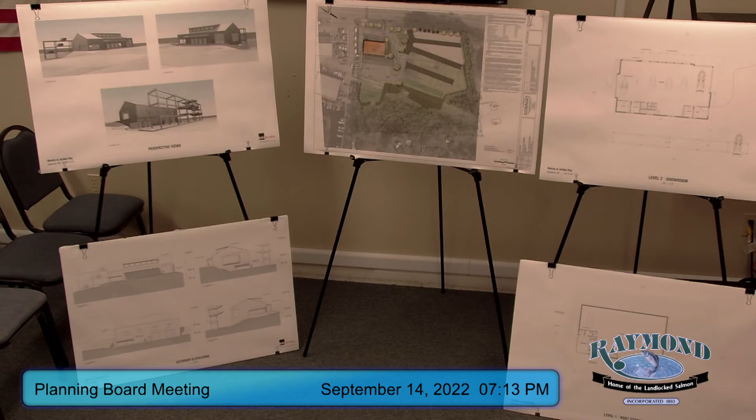The project in front of you tonight is an expansion of the Jordan Bay Marina proper marine site. Our client purchased the property to the south of the marina, formerly owned by the Hartleys. The parcel we're looking at developing is about 5.9 acres in size. Of that 5.9, we're really looking at developing the portion that fronts Roosevelt Trail back to the easement that Portland Pipeline has through the site. We don't plan on anything other than stormwater management beyond that portion of the site.

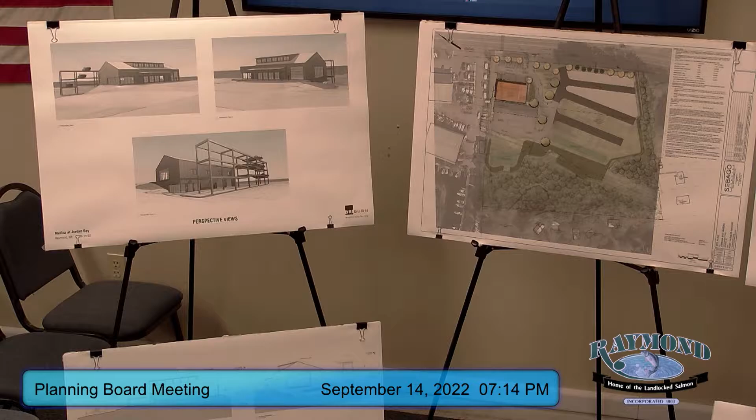As mentioned at the beginning, we had a sketch plan meeting with you all on May 11th. Subsequent to that, we presented that we were going to have a pre-application meeting with MDEP, which followed a couple weeks after, and it was a good meeting. On June 2nd we had the site walk, and a fair amount of neighbors showed up for that. I thought it was a positive meeting with some positive feedback. A couple weeks later we resubmitted back to MDEP from the preliminary submittal we'd given them. They wanted additional information from us to determine whether our project would need to be reviewed under the site location of development standards, or whether it would just fall under Maine stormwater and NRPA rules for the wetland. Based on that, they came back and said we don't hit SLODA, so the only thing they'll be reviewing the project for is Maine stormwater law and the Natural Resource Protection Act for the wetland.

Since that time, we've done some major coordination with MDOT. We've met with them, and we've also reached out to Portland Pipeline and Portland Water District to make sure we had their input relative to the project. Tonight we've also brought elevations and renderings of the building. We did not have that in our initial application, but we had commissioned an architect to start that process, and those have been provided as part of the resubmittal materials you'll probably see within the week.

Beginning of August we made our submittal to the town. We also had another neighborhood meeting on August 10th for the submission we had to make to Maine DEP, to go over the project once again and highlight the natural resource permits we had to get and the stormwater permit we were getting for the site. Once again, we felt that was a good meeting with the neighbors.

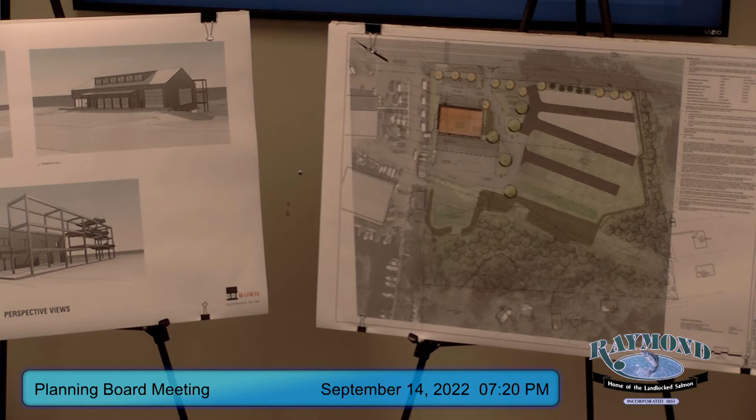Part of the final design will involve looking at energy efficient heating and cooling processes for the building, and conservation and eco-friendly design relative to fixtures. Lighting will most likely be LED, with solar electric and low electric use.

Landscaping, once again, we have the natural buffer along the southern and eastern sides. Along Roosevelt Trail we've framed that with street trees, mostly maples, but broken up a bit with a series of greenish colored conifers so you're not looking at one static, continuous row of maples. You've got some maples, some conifers and maples, and around the front of the building there'll be accent landscaping along Roosevelt Trail, as well as juniper plantings on the slopes adjacent to the building, so it'll nicely accent the building.

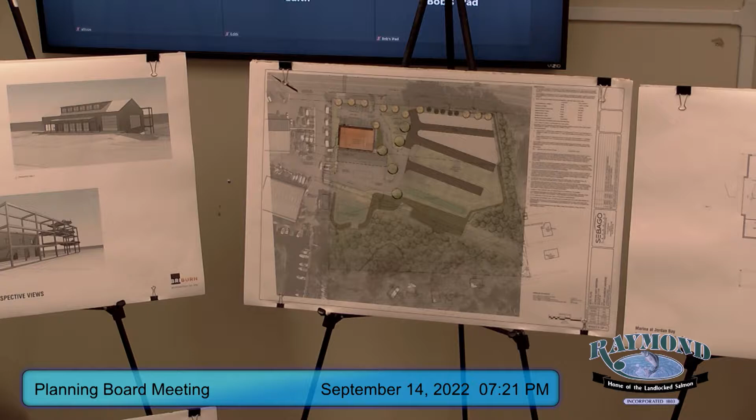Lighting, once again, the building itself will have a lot of natural lighting inside. What we'll probably do on that canopy portico that overhangs is have some down lighting right there on the sidewalk fronting the building. We have shown lighting on our site plan.

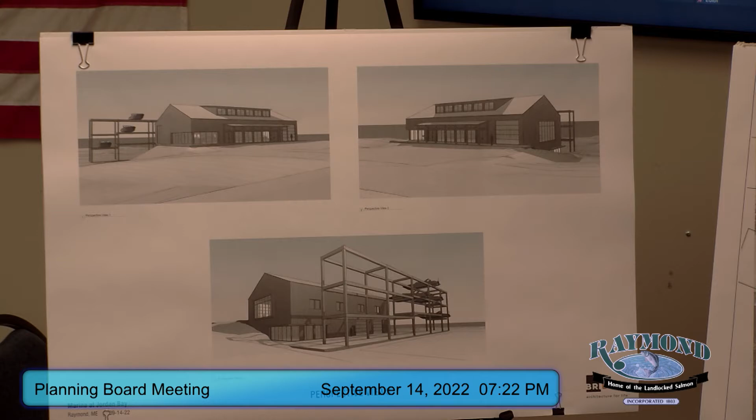We'll have full cutoff fixtures. They're all LED, very energy efficient. They match what we used on the project that we did 7 years ago, when we redid the front of the Marina site. We put some lighting in there, and it's that full cutoff LED lighting. And some lighting there on the building also, and probably some accent highlight lighting for the building. Nothing that upshines, of course. We want to have dark skies and whatnot, but stuff that comes down to the ground and whatnot.

Signage, we're not really sure what we want to do. We know that we want to put some signage along the front. On the plans that have been resubmitted to Will and Wayne, there is a monument sign, ground monument sign, adjacent to the front entrance. It'll be two-sided, so you'll see the name from both sides. We'll also, as part of the comments from Wayne, put the addressing on there so that emergency personnel can capture that when they're coming in and whatnot.

So that's kind of an overview of the highlights of the project. And now I'd like to go and touch on the comments. Comments were really straightforward, comprehensive and whatnot. I'm not going to mention all of them. I just want to go through and highlight some that are informational for you, and some that we feel we need some direction from you on.

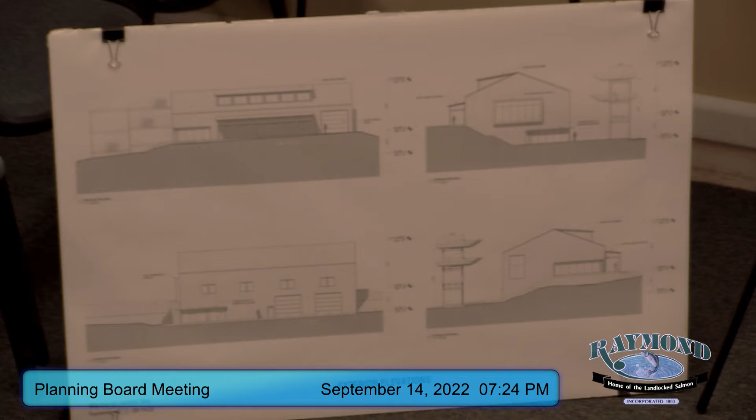And if you remember, as part of our last approval for the dock expansion, we were to put a meter on that bathhouse building and meter that. We have been doing that most of the summer. I think it was late June, July, up through every week I get an email with a picture of the meter so that I can record that data.

And we've used that data to design the sanitary system that we propose for this project. What we've done is we've conservatively taken that flow that we've got, upped it up, I think it was 50% more, taken all the flow from the other building, put that on top of it, and whatever flows we would have from this building into that new system in the septic tank we'll be putting on this parcel. Right now, we'll still continue using the other system. Once we build this building, the only thing that will go to that is the older building. Once we have a problem with that field, we'll stub out our system such that we can connect in—the field that we're putting in is already designed to handle that.

So, is the old bathhouse going away? Is that what I heard you say? Yeah, the use of it as a bathhouse is going away. We don't know what we're going to do with it now. We may use it for storage or something like that, but it will not be a bathhouse facility. So that was one of the comments. I just wanted to highlight that for you all.

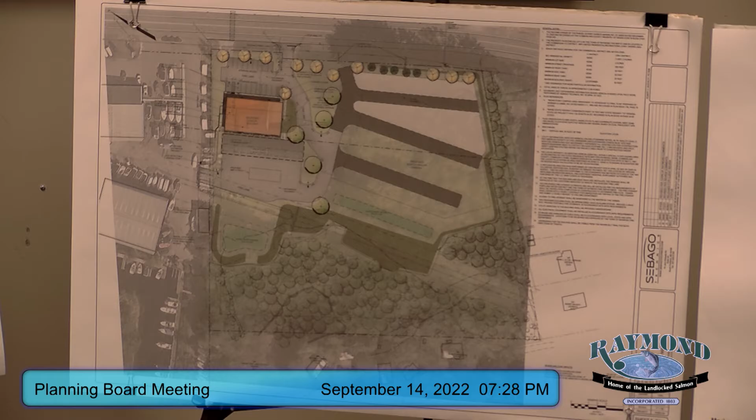Over where our other stormwater pond is, there's a little bit of filling in over at that location too. We mentioned that within our initial submittal letter. Will had asked us to provide the exact volume that was in the filling. We actually did a more precise calculation, and the number actually went down. We have about 54 cubic yards near the underdrained soil filter number 1, which is more to the southern side, and then about 96 cubic yards on the other one.

Originally we had said that the result of filling that, if you look at just the surface of water on Sebago Lake, the filling would be 0.00005 something. Well, it's now 0.00003 something. So it doesn't impact the flooding for the lake.

Relative to our permitting, once again, we have submitted it to everybody. We do have responses from IF&W, Maine Historical Preservation, and the Conservation District, Conservation Commission, and there was nothing flagged by them in their replies. Once again, Army Corps, MDEP, Stormwater, NRPA, and MDOT opening permit for the water line, and the driveway entry permit is in the process right now. We hope some of that will be resolved by the next meeting, but we think DEP may be out a little longer than that.

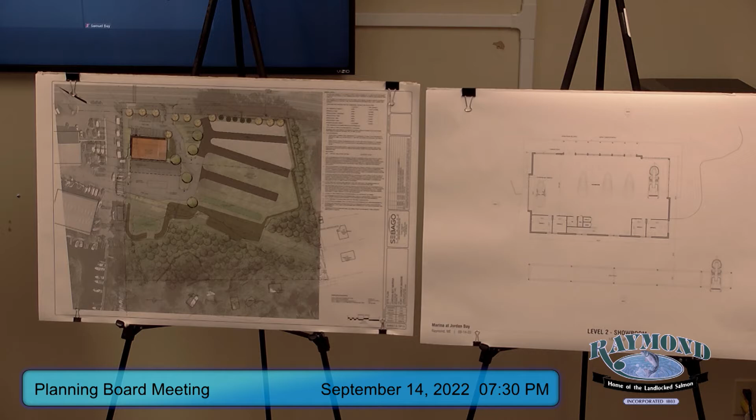Down to comment 20, I did a brief overview of the information relative to the design guidelines. There's a much better write-up in the response. Our architect did a very good job, and then I added in some stuff on that. I went over the building and the concept and whatnot, and I can elaborate more on that if you have questions.

Sneaking down to comment number 21. As part of the project, we've shown parking along the front of our building. We originally had 19 spots. We've lost one of those spots because we need to have a clear aisle into our fire department connection. By code, we need about 30. For the use that we already have on the site, we know we don't utilize that much parking in front of the building, and we addressed that in our narrative.

Will suggested that might be handled by the board through a waiver condition. We stated that if there's a problem with the number of parking, then we will provide additional parking over where the boats park for our employees. But we feel that the 18 spaces that we have are sufficient for the site, and would like to have direction from you all on how you want to handle that.

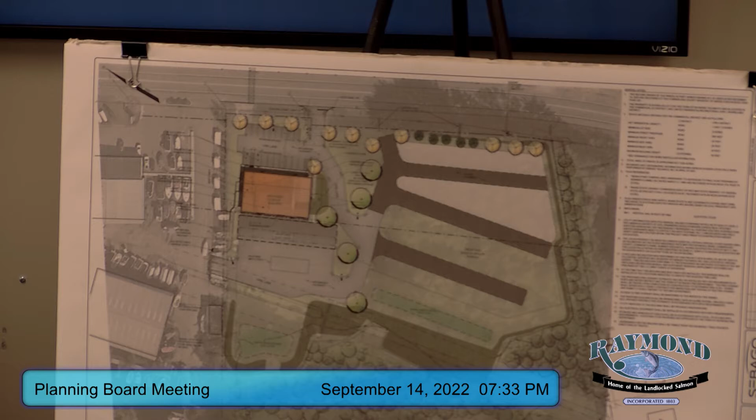Skipping down to number 31, the ordinance requires 100 square feet of intermediate landscape island in parking lots for buildings greater than 5,000 square feet. Once again, the parking that we've supplied is a little over half of that. We've tried to offset that by having a green expanse area to the south of that, and we're not sure whether the green area we provided in the landscaping in that general area is sufficient to cover that.

Or do we need to carve out another island in the middle of the parking there? So, some direction from the board on that.

It was requested that we provide a photometrics plan. Lighting was put on the site plan relative to what we felt would be adequate for security purposes. Really, we don't have a big nighttime use here that happens when you need lighting. Most of our activity is in the spring, summer, very early fall, and to have a really lit up parking lot doesn't make a lot of sense.

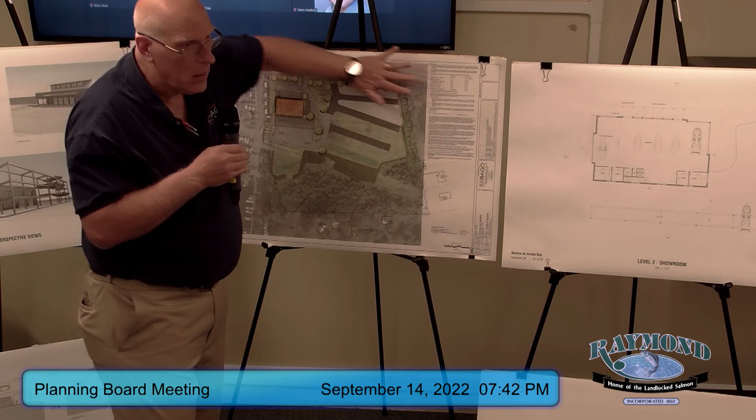We met with DOT on the driveways and on that drainage, and what we're going to do is regrade that. We're going to put some stone there so that it doesn't get all monkeyed in again, and that will drain off into their swale that goes along Route 302 and Roosevelt Trail.

As part of looking at that, we looked at the downstream pipe to make sure that would not be a problem, and have demonstrated that it's hydraulically sufficient for any flows. We think most of this flow goes that way anyways.

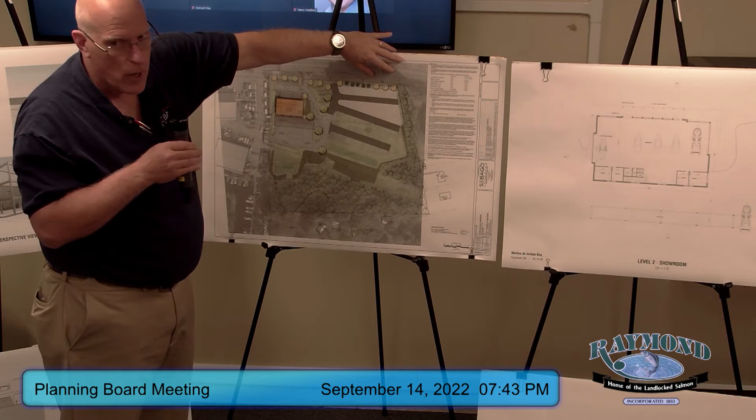There's a kind of a slight depression here. Some of it might fill up and had been meandering through the property, but we believe most of it was going that way. To make sure that the pipe could handle all of it, we looked at the drainage that came through that, being very conservative. We took into account all the area up here that currently comes over here, which probably backs up here and then goes across this property right now.

So Rob, if we look at the existing conditions, the water now, the stormwater that comes out of the treatment and is going into the buffer, that water is eventually going to leave the property. Yeah, it's going to go back to the wetland where it goes.

Everything right now drains this way. Right, but isn't the bottom there Indian Point? No, there's a wetland right here, and it goes down and then down into the lake. That's a historical flow. It doesn't go directly into Indian Point. This wetland complex drains, and then that goes down into the lake.

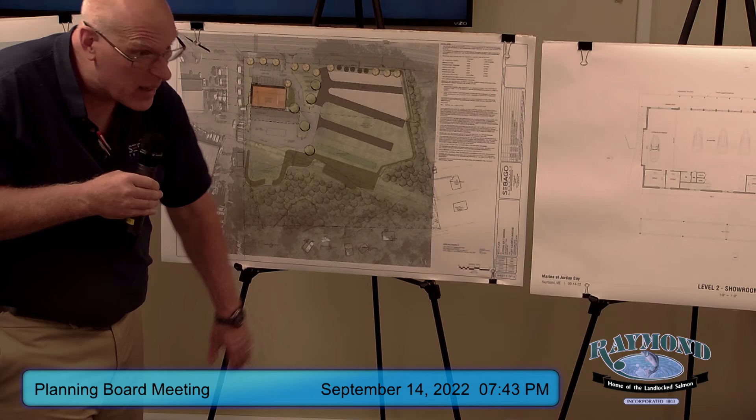So the houses shown here on this existing water flow, they drain back to that wetland also, and that flows around and out this way. Are there, I probably should know this, calculations that show the increased amount of water runoff that's going to occur over the impervious area, as opposed to what's happening now?

We've done pre versus post based upon our development that shows what's going to happen. We attenuate that as part of our stormwater design. And now we know that the wetland area is not going to be overrun with the additional water? It shouldn't be, no. Do we know that, or just we're hoping? Well, the underdrained soil filters are also detention, they provide a certain amount of detention, so they've basically met their pre versus post. What happens before it is discharges to the wetland.

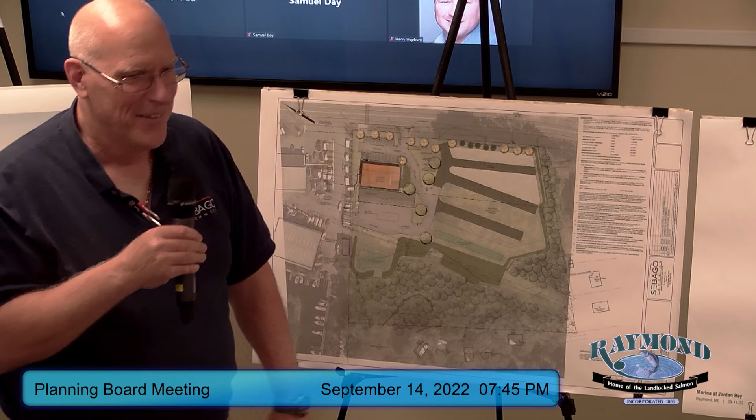Okay, thanks, okay, you got it? Got it. I'm good. Just think of it as a bowl with a little hole in the bottom. The water gets poured in there, and you're waiting for it to all leak out.

I think those are the only things that I wanted to cover. The other comments relative to the, from Wayne, I think I addressed all those. A lot of them were notes on the plans or showing stuff on the plans. He probably hasn't fully reviewed them, but I think we've addressed everything there, and I don't have any concerns on them. I think we'll work out whatever little things are left. And if there's anything that I didn't touch on in the comments that you guys have read and you want to address, I can address that now.

Yeah, so I mean, I think Rob basically addressed all of the ones that I had circled as well in terms of the ones that I thought he should touch on, so I think we're on the same page there. I guess a couple things just to touch on. Obviously we still need time to review a lot of these comments that we just received, so I can't address all of them in terms of what we received this morning, but I guess one that I wanted to touch on.

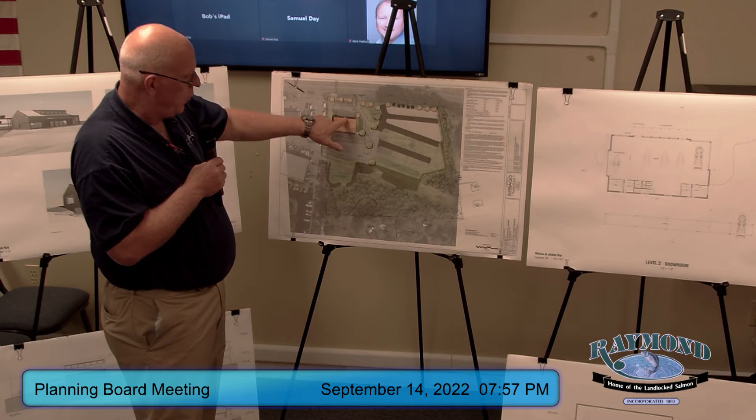Okay, good. I had mentioned we had one in the front here before. We now show two there and two in the back. There'll probably be some different configuration in the final because of the nice architecture they've come up with. Yes, everything will be shielded down. Actually, that was comment 32.

Regarding comment 21 about parking, do we know what the ordinance requires? In other words, 3,200 square feet - how many parking spaces? 30. So we're proposed to go from 30 to 18. 18, okay.

Jim just pointed out Article 9, this is Article 9C4, which is off-street parking. It says, in all districts, the reviewing authority may allow a reduction in the number of spaces actually constructed, provided the required number of spaces could be constructed on the property while meeting all other space requirements of that district and all applicable standards, including but not limited to stormwater quality and phosphorus control.

So it basically says you could allow a reduction, I'm assuming without a waiver, if they could show they could construct the additional 12 spaces, or provide those elsewhere, and you could do that without a waiver. To me, if they can't or don't want to provide that space, that would justify the need for a waiver.

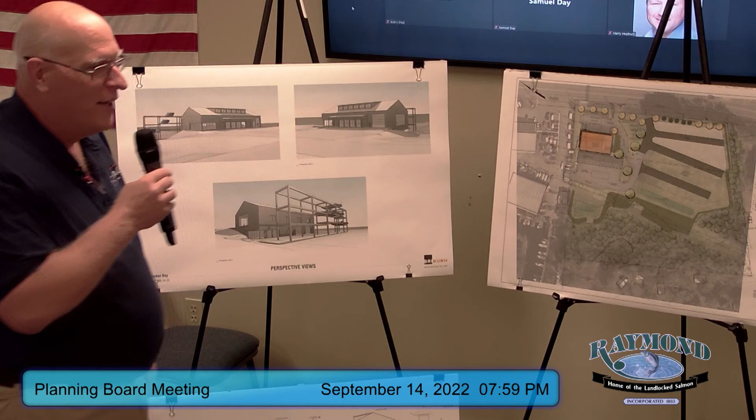Yeah, you can see in the perspective here how high the boat rack is relative to the building—we deliberately made the peak of the building above it to shield as much as we could. And over on this side, we have some additional larger trees, something like arborvitae, they get big. The plan view down there actually shows that pretty well in terms of how high the boat rack is relative to the peak of the building. It's pretty well hidden behind it.

We'll get full copies of this next week.

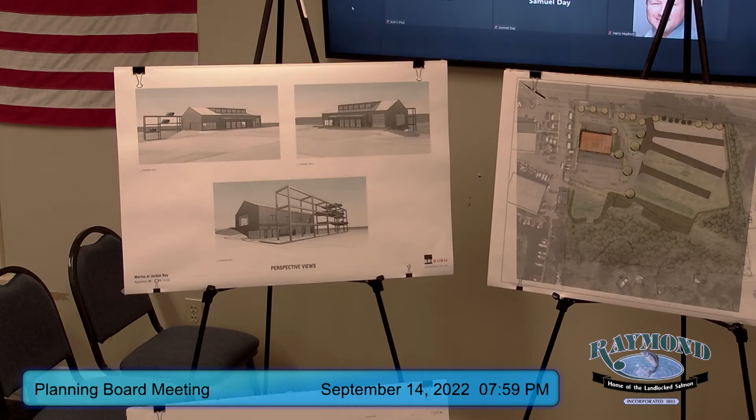Do you have any concerns about the Portland pipeline allowing you to run a pipe across their easement? No, because we dug it up, we test pitted it, and we actually submitted a plan to them that showed it going over, showed the separation. The only note they came back on was they wanted to know the elevation of the other pipe—we didn't give the inverts on, or the top of. It was actually lower, so I'm assuming based on the fact that they only wanted that information, they're not going to have a problem.

Very good. I'm good. I'm good. You're good? Bob, okay, did you want to see if Wayne wanted to weigh in at all? Sure, Wayne?

Hey Wayne, before we start, your memos have gotten really, really good lately—they're easy to read, very thorough, lots of references, greatly appreciated. You're very welcome. I'm learning as I go.

How's that, Bob? I haven't had a lot of time to look at today's submission, but some quick items I saw that hadn't been addressed from my memo: the fire flow calculation for the main coming across the street, which is going to be really important given the potential fire load we could have with this project. Knowing what that new system would be able to flow is really important.

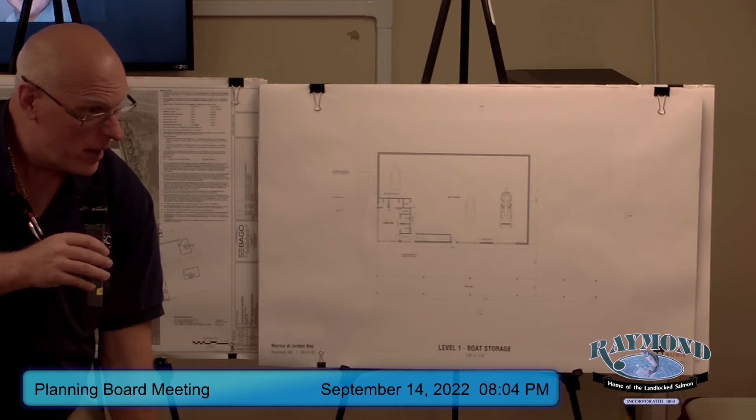What are you using it for? If you look at this floor plan, this is the upper level, and they basically want to bring boats in here and display them. This big open area is for boat storage or boat display, and then we have some minor amount of offices on the back side. On the lower floor, that one corner of the building is where we're going to relocate the bathhouse facilities to, with a little atrium. And over under this part, we'll have garage doors so we can bring boats in to do some service work on them.

Okay, so you're going to have office spaces, maintenance, and a showroom—is that correct? Yeah. I'm asking because of the parking. We've got 18 spots—how many of those will your staff occupy? The staff will probably park in the back of the site. We're not going to allow...

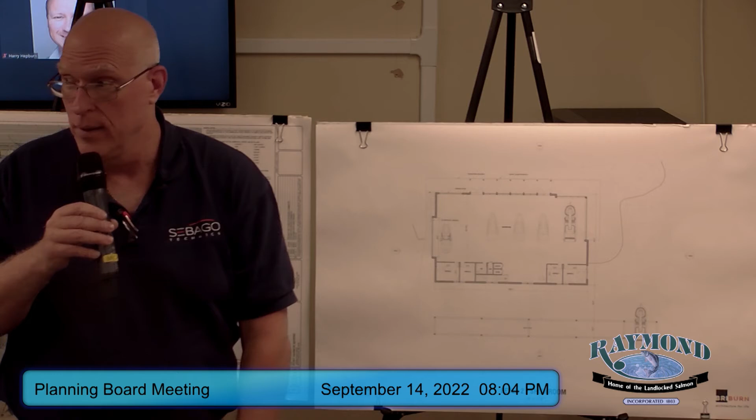It's not really adding anybody. We might add one salesperson, but we're just taking people from the other building and moving them over to the new building, basically moving the sales department. So where they park now, they can continue to park. And for customers coming in, we're adding 18 more spaces than what we have now.

Customer spaces, that's right. Based on the addition of the new dock system and more boats, did you have any trouble at all with parking? We did not. As part of our condition for the dock approval, we installed a camera out there that records continuously, and we went through all of that film from last year and submitted a report. I sent it to Alex in September. We had no problems at all last year, and no problems again this year.

Mike, who's not here, was wondering about the visibility of the boat storage racks from the southern part of the property, where the buffering is thinned out. His question was, where is your landscaping? The southern end would be here, from Indian Point. Would it be possible to add one or two trees in that landscape spot to buffer it?

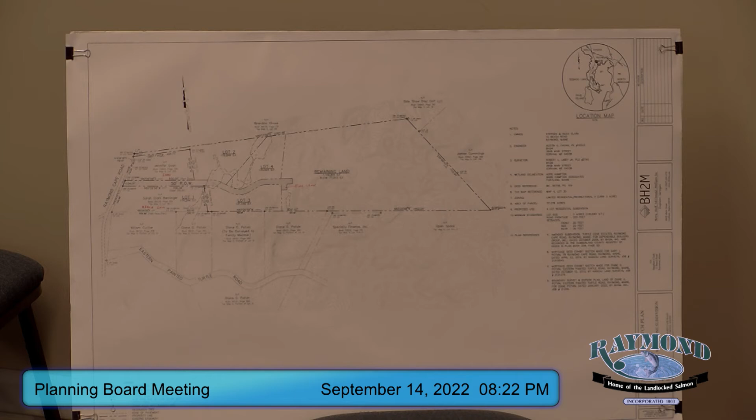Lot 1 has its frontage off Raymond Cape Road, so it's not required for the private way. We're bringing a driveway off it because it makes more sense. So if that lot was exempt, would we only have 3 plus the back lot? Is that back lot, or the front lot, not exempt? That's part of the subdivision.

Right, it would have to be 5 years old to be exempt. If it was 5 years old, we'd exempt it, but it's not.

I think you're gonna have to address that remaining land. As you've got it drawn right now, I don't speak for the board, but in my opinion, it's lot number 5 — it looks like a lot. And if it was a lot, then at 5 lots, you could look at it for open space development.

So you could reduce lot sizes and do things like that. The other thing too, as I mentioned before, if the board looks at it as 5 lots, it does change the requirement for the road slope. I know it works well for 12%, but you may want to look at it at 10%, just so it gives you some flexibility if you decide to develop that remaining land in the rear down the road.

Now's the time to do it, because you don't want to make a 2% grade change after everybody's in and built.

Okay, I appreciate those comments. Did you have anything, Steve? I don't think so — I don't really have any future plans for development beyond the 4 lots that exist right now. The only thing was with that remaining land, I thought of it as one big buildable lot in the future for a personal home or a family member.

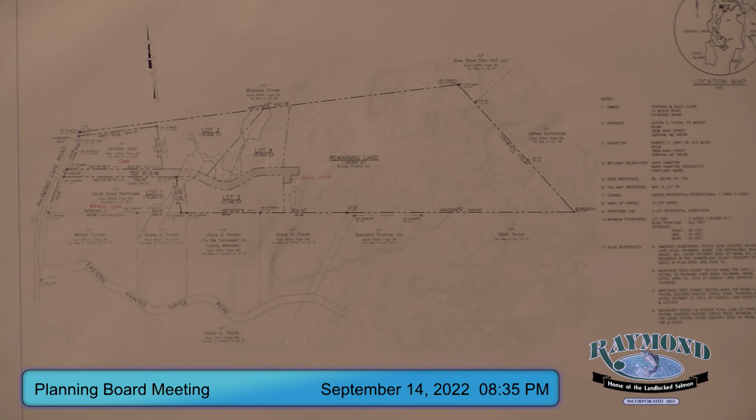So at this point, we would normally schedule a site walk. I'm not sure that would be beneficial at this point, until you guys decide what you want to do for your design.

The road's not going to change location. I don't think it would do any damage to do the site walk now, do it while the weather's decent, rather than trying to do it in December or something.

We'd be wondering if lot number 5 isn't going to be, we wouldn't wander all the way down there, but they can still mark it out and we can still look at it. You can see what's beyond the turnaround, and we'll know what the conditions are. I think we can review the land, and if they decide to divide it or do whatever, at least we can review the land.

What is your timeline? We just want to keep it moving. This was a critical meeting here, and we could have a layout ready in a couple weeks.

If you set certain times that you schedule these, do you do them before a planning board meeting? The site walks? No, there's no certain time, we just reach an agreeable time, it just has to be, we need to get the notification out that the site walk is being done.